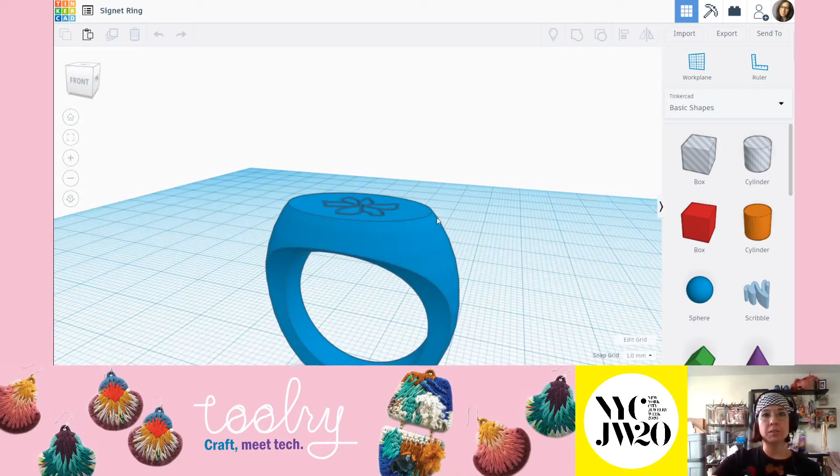So, the signet ring. I'm going to walk you through what we're modeling and the order we'll be modeling in, so you can know what to expect as we go along. This is an example of one I had done as just a little demo.

The way this is going to be modeled: we are going to start by defining this inner ring size, or the cutout of the shank, and again I will be using measurements of a size 6, so you could follow along if you'd like. Then we will move to starting to build this exterior shape, building out the actual volume of the ring itself.

We'll then position the cutout so that you start to get this flat surface up here. The last bit will be moving to the side and really carving down this profile. A signet ring is classically shaped with this flat, plateaued surface that has an engraving, an inscription. You could add raised details. I'm just going to show you how to do a simple engraving, but you can really have fun with this.

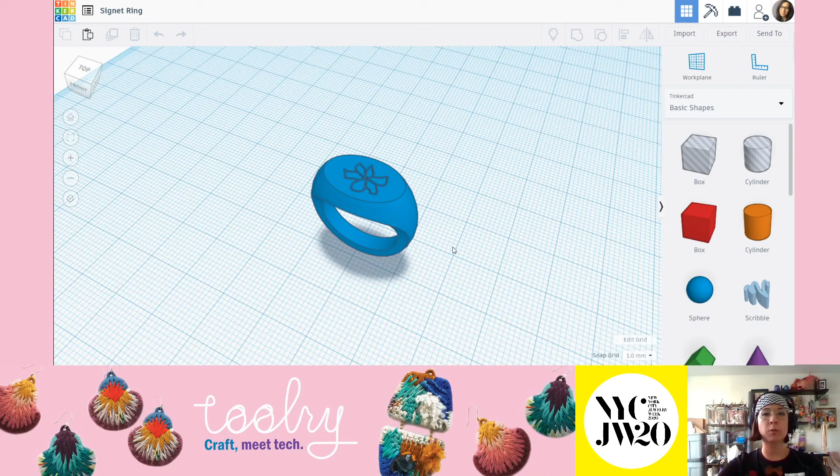This is a classic shape signifier of a signet ring, where you have this wider platform that then cuts down into a narrower side band.

One thing a bit different about this compared to other classes, if you've joined me for previous weeks, is that we will really be setting everything up. You'll have a lot of objects on the work plane before we trim everything down. It can get a little confusing because there's so many different pieces of geometry, but I'll walk you through each of those, and you'll see how it comes together very quickly at the end.

Some general guidance about this ring: if you do choose to fabricate it on Shapeways, where there was a coupon code up on the screen earlier, this ring as shown runs about $40 to $60 on Shapeways. However, it's not hollowed out, and I'll remind you at the end how you might want to hollow that ring out, which will cut away that price a lot, because the pricing is very dependent on the material used—how much brass, bronze, or silver you're using in that piece.

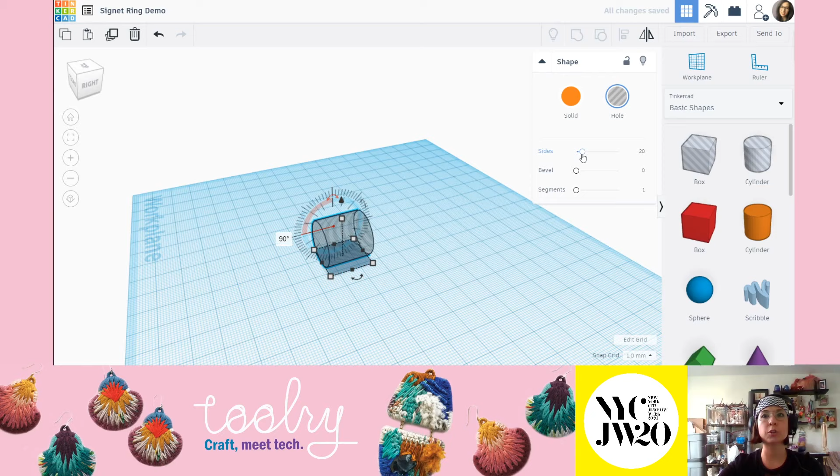Okay, so now it's your turn to go ahead and do that. I will do that again. We are going to grab a cylinder from the work plane, the cylinder hole, that one at the very top that's gray striped, single click to select it, and drop it onto the work plane. Then we are going to rotate it by 90 degrees, and increase the number of sides over here in the shape menu up to 64.

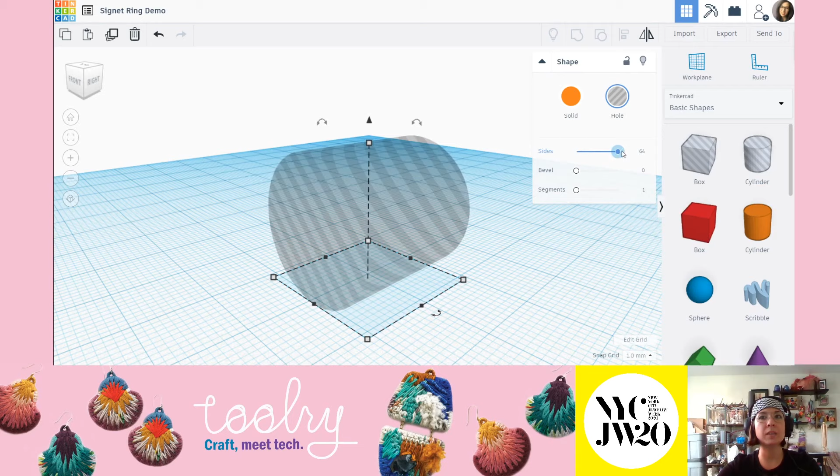Just to show you why we're doing that, if you're not familiar: I'm lowering it so you see when I've lowered the number of sides, this round shape is actually very flat and faceted. That's because this shape is a series of flat mesh faces, which is how it's represented in 3D software. What we want to do is increase the number of sides, or faces, to the maximum, meaning now it's a much smoother cylinder. You can still see these facets, but they're much smaller, and that gives you a much smoother finished product versus that more faceted shape.

So I'm just going to show that one more time to get you started: grab a cylinder, drop it to the work plane, rotate it by 90 degrees, and then increase the number of sides to 64. Okay, that's where we're at now. All right, so everyone should have exactly this on their work plane.

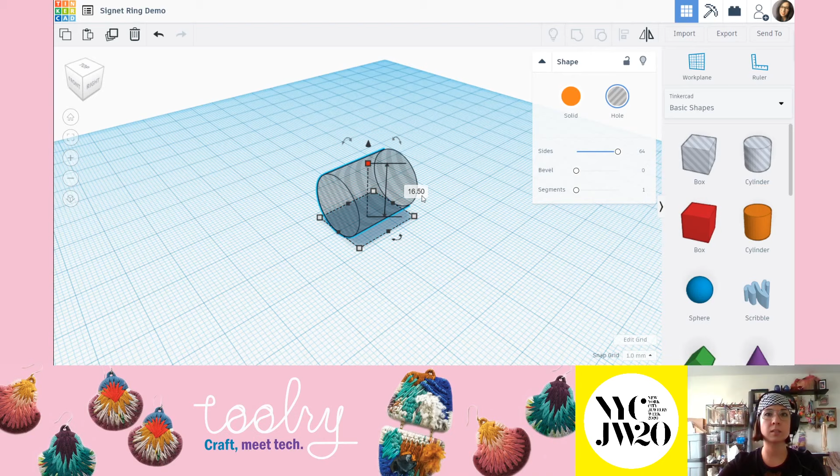So we are now going to resize this. All of these basic objects have a default size. The cylinders are 20 by 20 millimeters. We're going to change that now to be your ring size. As I mentioned, my ring size is a size 6, which equates to 16.5 millimeters. So I'm going to change my dimensions to 16.5 - oops, sorry, that was the wrong size - to 16.5. So I changed this front measurement to 16.5 and also the height to 16.5. I'm also going to be changing my thickness.

So at this point, you kind of have to decide what your ring shank thickness is at that thinner area, at that sort of side and bottom of the ring shank.

This is always up for changing, and the beauty of this design is that you can change it at any given time. We don't really set things in stone until the very end. So if you feel like it's too thin, too thick, you can always change that. Let me just do that again, and at this point you're welcome to follow along.

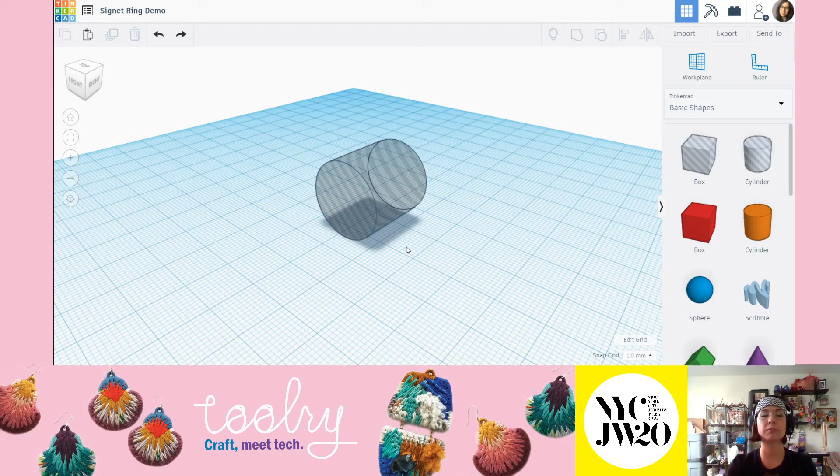I'm going to tell you what I'm going to do first. I'm going to change my ring size, change my cylinder size to match my ring size. And then I'm also going to thin it out to be the same thickness as the finished ring itself on that bottom and side walls. So doing that on screen, go ahead and follow along and do this as well.

Changing my measurement from 20 millimeters, which is the default, to 16.5, which is a size 6. You would key in your own ring size if you're doing a different one. And then also this height to be 16.5. And then the last thing is to narrow this cylinder out to be your desired thickness. I'm going with 3, that's what I had done on the model that I showed you.

I would say you could go down as skinny as about 2 millimeters, and as chunky as about 5 millimeters. If you go much chunkier than 5 millimeters, be aware that your ring size might have to get bigger. The wider the shank or ring band is, the more of your skin that gets in the way of it. So I'm a size 6 on my ring finger in a skinny band, but I'm like a 7.5 in a really chunky band. Just keep that in mind if you have a set ring size in mind.

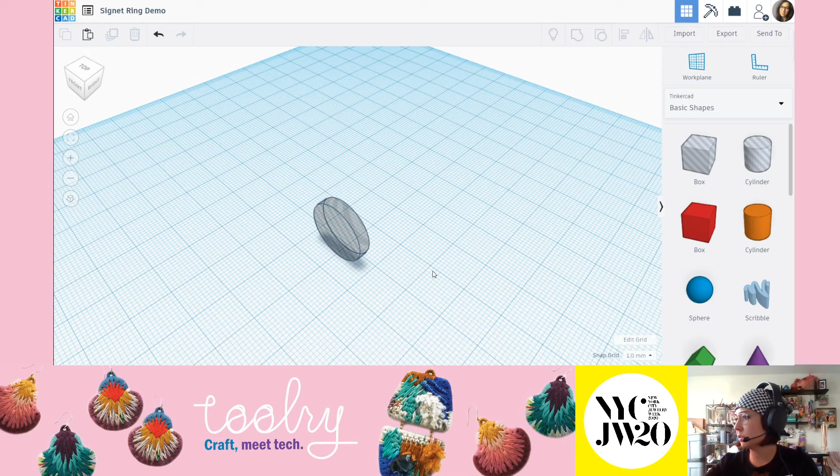Okay, looks like everyone is still caught up. You should now just verify on screen that your cylinder hole is your ring size, so 16.5 for me, and then I wanted to go with that 3 millimeter thickness. Yours can be wider or narrower if you'd like.

Okay, so the next step we're going to grab a sphere, and you can just watch this part. We're going to grab a sphere from the basic menu, and we're going to drop it right over top the cylinder, and it's going to cover it, but don't worry, we're going to change it to be a hole so that we can still see everything happening inside. Go ahead and do that with me. So again, that was grabbing a sphere from the basic shapes menu and dropping it just roughly on top of your cylinder hole. It starts out as a solid.

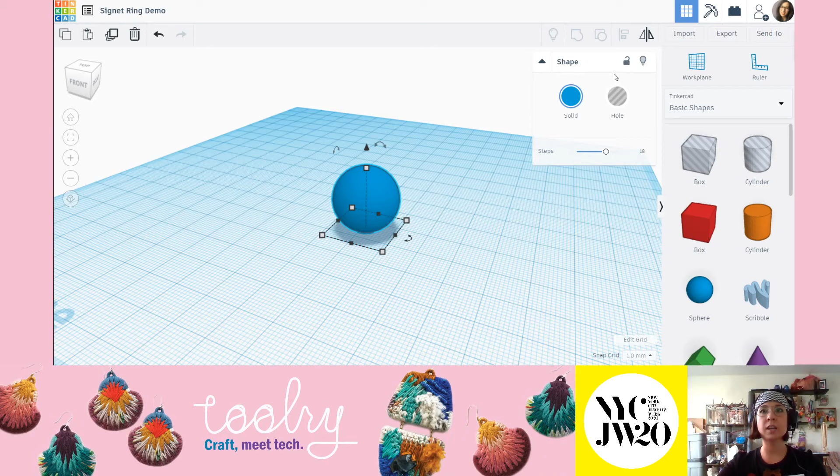We want a blue solid, it should look just like my screen. We want to just change that to be a hole as well, and it's going to be sitting pretty much right on top. Don't worry if it's not totally centered, we'll fix that. Okay, scrolling down, okay.

So this part, just bear with me for a second and kind of watch here. This is where it gets kind of tricky because we're not going to see things really coming together for the next few steps, so you'll just have to take my guidance and trust that it's going to turn out okay. So this sphere that we just put onto the work plane and turned into a hole, this is now going to be the outside.

This is really setting the wall thickness or the ring shank thickness. So this is really what's going to end up - it's going to be a solid, and this is going to be essentially the body of the ring. This sphere is going to be the whole body of the ring.

So you have to decide at this point, what do you want that ring band thickness to be? For me, I like to go anywhere from about 2 millimeters to like 3.5 millimeters, because think about, this is going to be what sits on your finger. And if you make it really, really chunky, it's going to feel like you're spacing out your fingers at the knuckles. So this is just like, what is the thickness of your ring?

At that point, you then have to decide what my new dimension is to account for that thickness. Let me give you an example. I want to have 2.5 millimeter band thickness, and that means that I have to add 2.5 millimeters on one side and 2.5 millimeters on the other side, totaling 5 millimeters. So my sphere is going to be 16.5 millimeters plus 5 millimeters.

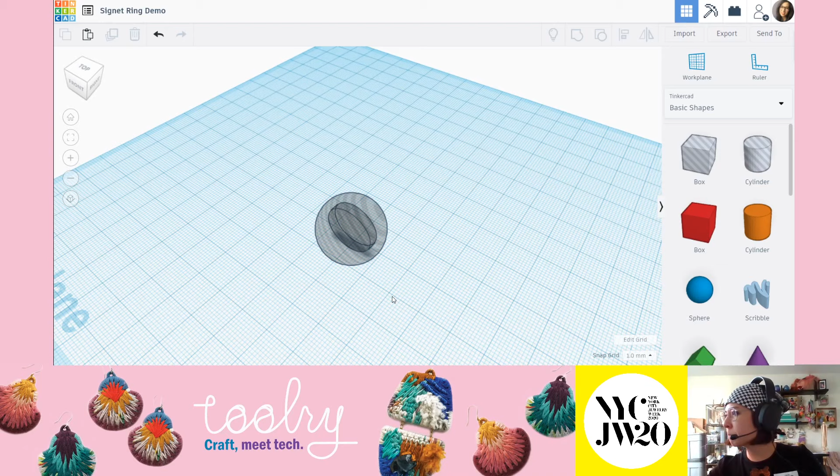Okay, keeping an eye on the comments, but looks like you guys may have figured it out. So moving on, we are just going to quickly center these two objects together.

A tool, if you're not familiar yet, I love this tool - this is the align tool. What align does is it lines up objects by common points, and in this case, the center point. Let me just show you on screen what that looks like.

I am going to use a bounding box, and to do that I'm single clicking and dragging my cursor, and everything that my cursor touches is now selected. I can verify that by looking at the shapes menu, which says 2 shapes are selected. What I want to do is select the Align tool, up in this corner above the Shapes menu. Now I get all of these nodes that pop up.

These nodes are various points of alignment that I can choose from. If I hover and don't click, you'll see different points of alignment preview itself in red, and the objects temporarily move to show me what those look like. That gives you some tips as to what you're aligning.

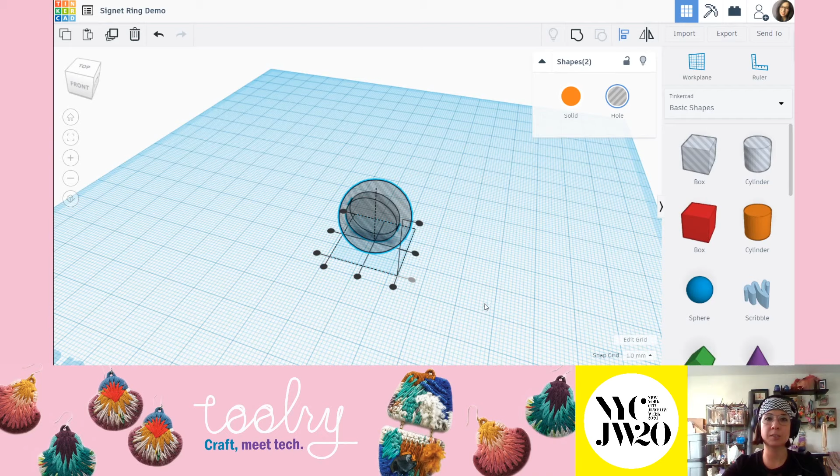What I want to be doing is aligning all 3 center points - there's a center point here, here, and here. That ensures that from every angle, those 2 objects are completely lined up in the center. You'll understand why we do this as we get a little further. So go ahead and do that.

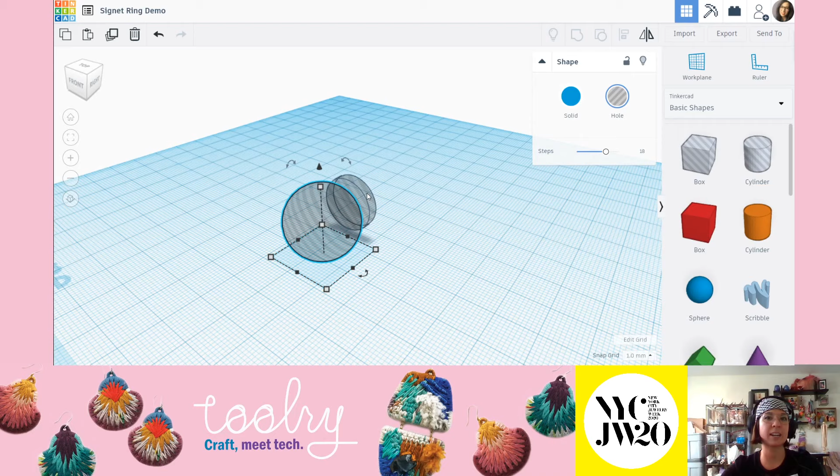I'm just going to make this more obvious so you can see what's happening. Go ahead and either bounding box select these 2, or you can select one, hold shift, and select the other object. That's a nice way to do that as well. It's a little harder when they're overlapping - you may not be able to grab one object. Oh, that worked, but it gets a little challenging as you've got multiple objects.

However you want to select both objects, do that now. Go up to the Align tool, and click all 3 center points of alignment so that they are grayed out - your alignment nodes should look just like mine. Your screen probably looks like mine, though your cylinder or sphere might be larger or smaller, but roughly this is what we're looking for.

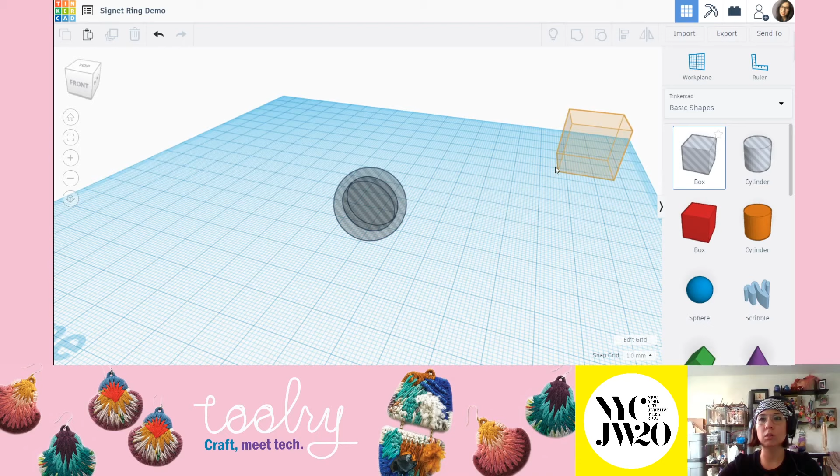Okay, to make it even more complex, we are now adding another object to the workplane. We are going to grab - you can just watch this, oh well this will be fast - you're going to grab a box hole, the hole box, which was next to the hole cylinder, and you're going to basically drop it in the same spot, overlapping with the 2 objects already on screen.

Once you've done that, go ahead and bounding box select those, then realign all those center points - you might have to rotate a little bit. So really all we did, and I'll do that again so you can follow along: you're going to grab a box hole, drop it roughly overlapping the 2 objects already on the workplane, bounding box select all 3 objects, and align like you just did, center points only.

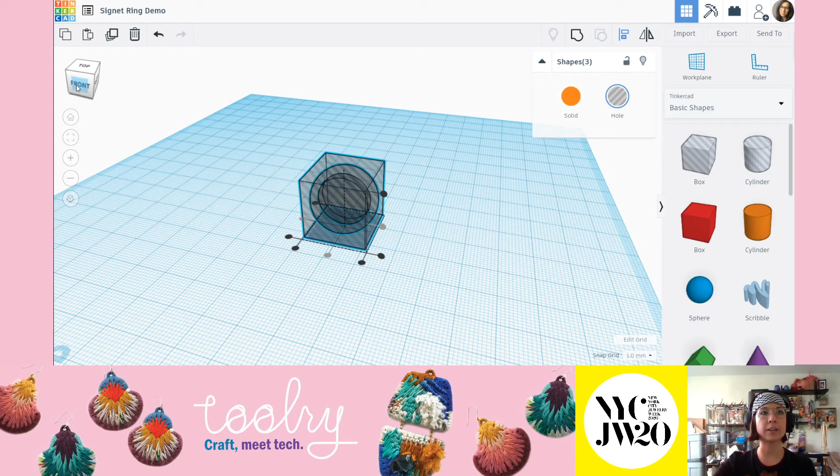I can also use that orientation cube to navigate to perfectly positioned views, and I want to do that now. I want to navigate to my front view, and you can just watch this part. So I'm going to click my front view on my navigation cube.

And I also want to flatten this. So now if you look at my screen, it looks a little odd, like there's still some perspective showing. I can see the back of the box. It's a little bit hard to sort of see these items as if they were a sketch.

So to fix that, I'm going to go down here and click on the flat view. And now this looks much more like a sketch and is much easier for me to view. Okay, so let me just show you that again and then go ahead and follow along.

So we've just aligned all of our three objects. We're now going to navigate on the navigational cube or the orientation cube, to the front view. And if yours looks like this, it means you need to click this bottom switch to flat view toggle. Your screen should now look like that.

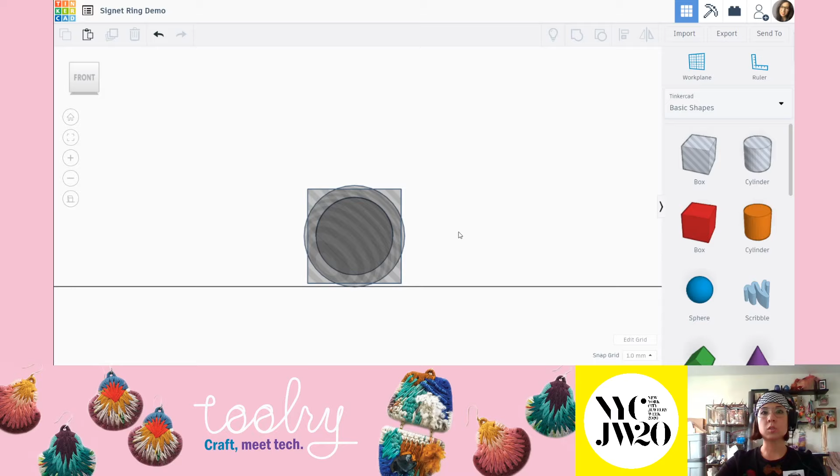Okay, so just watch. Sorry, let's grab a drink of water.

So just watch this step for a second, and I'm going to explain the next two steps that we're going to be doing, because this will really help you understand what you're trying to achieve. Right now I realize it just looks like a bunch of objects on top of each other, so just watch all of this.

We are going to be using this box hole to be the thing that slices the top surface of that signet ring. So the first thing we have to do is move it up here kind of out of the way and also widen it.

So I'm just essentially grabbing these nodes and then using my arrows to quickly center it. It doesn't have to be perfect because it's so much larger. I just want to show you, so I'm going to do all this again, just keep watching this.

So we're then going to lock this item, just because we don't really need to fuss with it for a second.

We are now going to, I had told you that this sphere hole, the second item that we added, was going to be the body of your ring. So what that means is I have to sort of deform this into that oval ellipse shape that you can then slice the top off to get that nice flat surface.

So to do that, I'm going to be grabbing this top white or hollow box, and I'm going to be stretching the proportions of this up, so it looks a little bit more like an egg right now.

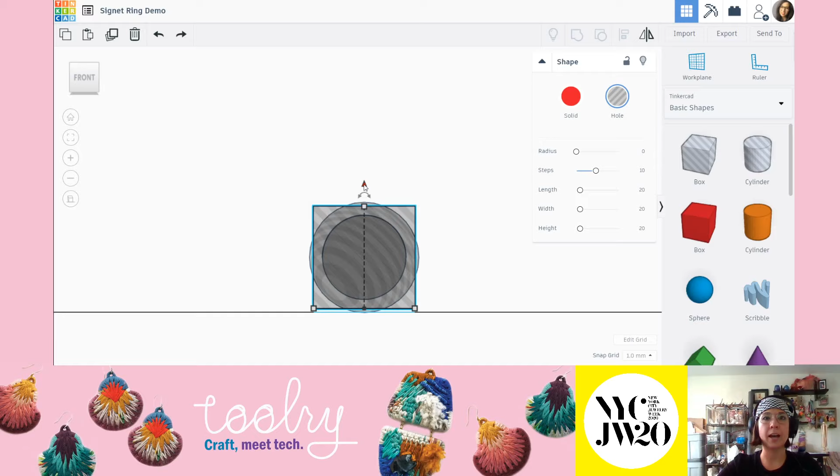Let me just do that again, and this time you can follow along if you have not. So we're going to select the box hole, use that black arrow above the box hole to raise it above your two circular objects. You're going to grab one of these bottom hollow or white boxes, stretch this box out to a rectangle, and then use the arrows to move it back roughly to the center point.

You can lock this, or you can keep it unlocked—it depends if you're going to have to move it again, you may just keep it unlocked. So the next step is going to be to grab this larger circle or sphere and reshape it to be more like an egg or an ellipse by selecting that top white box or hollow box and lifting that up. You don't want to grab the arrow, because that will lift the whole thing off the work plane. You just want to grab that top box and drag it so that you're reshaping it.

So at this point, this is sort of where you kind of play. I don't necessarily want to have a crazy high area here, so I actually might bring my box a little bit closer down. I think I like that a little bit better.

If at this point you feel like when you're moving the box, or resizing your sphere, it's moving in too big of a motion so it's sort of jittery, like clicking into place—that's because your snap grid down here is set to 1 millimeter, meaning every unit of motion is 1 millimeter. If you need more subtle movements, you can change this to be like 0.25, and now it's a much smoother dragging action. See how it's more smooth? I'm now moving in 0.25 millimeter increments.

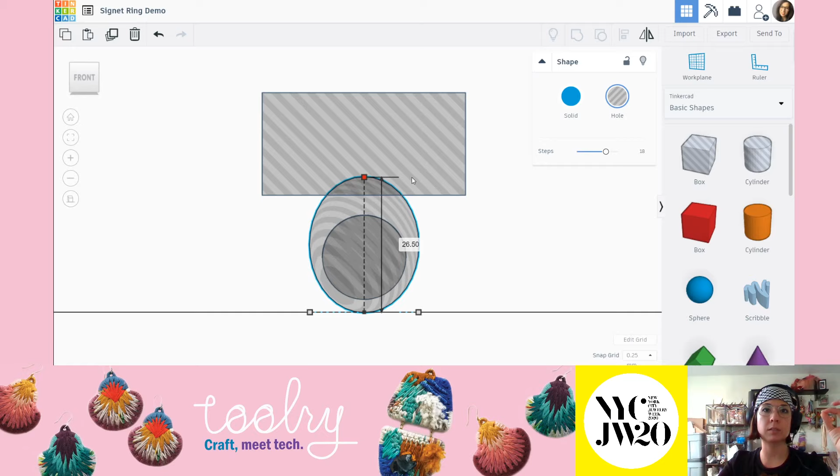So at this point, take your time to guesstimate what this is, proportionally, just looking at it. Again, we're not locking any of this at this point—we're saving that for the very end, so you'll have time once this really starts to fully come together to say, oh, you know what, I did want to make this a little bit thicker in this area, or a little skinnier in this area. You'll be able to move all that stuff along the way.

And this is an object that's very easy to ungroup and then unjoin these parts to edit as you go, if the very final ring isn't really to your liking. It's a really easy one to edit.

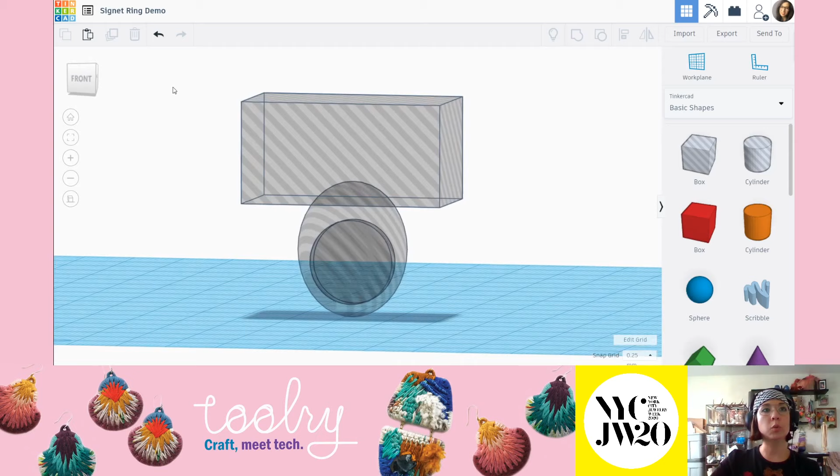Okay, so moving on, we are going to be going back to that orientation cube, and you can kind of just watch this at the moment, to now go to our side view. So our side view right now really doesn't look anything like a ring, so I just want to explain what we're going to be doing.

So what we're looking at right now, this inner floating cylinder in here—remember, that was the original ring size, the cutout of the ring itself. And this thickness right here was the thickness that you chose as your finished thickness; it was the very first step that we did. So this right now is really only serving one purpose: it's acting as a guide so that you can then build all these other objects around this and know what your original intention was.

This object, the sphere that's now more like an egg, this is going to be the actual body of our ring.

So we reshaped it from the front view. This is our surface cut. But now we need to reshape it from the side view, because this is a very wide ring at the moment. You might be feeling like, I don't know what we're looking at—this doesn't feel like a ring. It's really not going to feel like a ring until the last few steps, so don't worry if you're feeling a little confused at this point. It's going to make more sense pretty soon.

So let me have you go ahead and do that. We were in the front view, so use the orientation cube and click on that right flat view, so yours really should look very similar to mine. You should have the 3 objects showing, they're all holes, and you're seeing this flat view. Remember, if yours looks something like perspective, just toggle this flat view button down here on the left side.

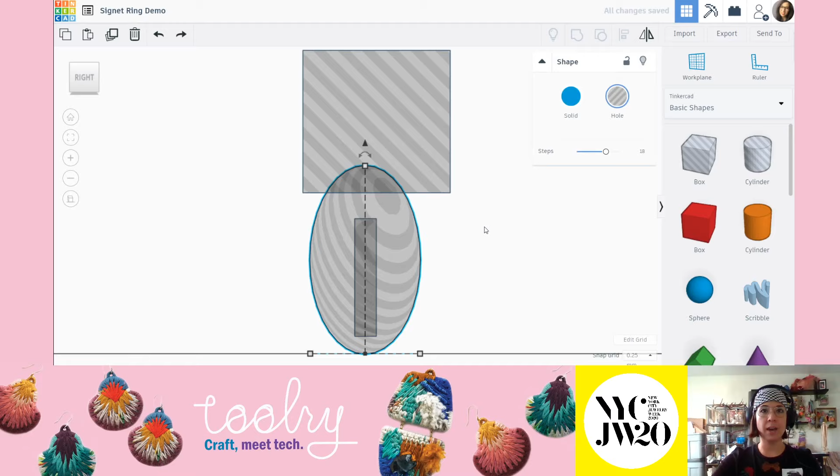So really, I'll just undo that. That was really just starting here, making sure your snap grid is at 0.25 millimeters, and then adjusting, narrowing out. You could also make this wider—if you want this to be a massive ring, knock yourself out. But I would recommend staying where you're at or going a little narrower, just to make sure the fit is still going to be okay for the size you're doing.

So you should have some kind of egg shape here. You could really make this skinnier, you could really go like this if you wanted, if you wanted a really little super delicate ring up there as well. So just work through that. Again, all of this is open for changes before we finalize everything. So if you're still kind of lost and like, how is this going to turn into a ring? We're getting close. Okay, so moving on.

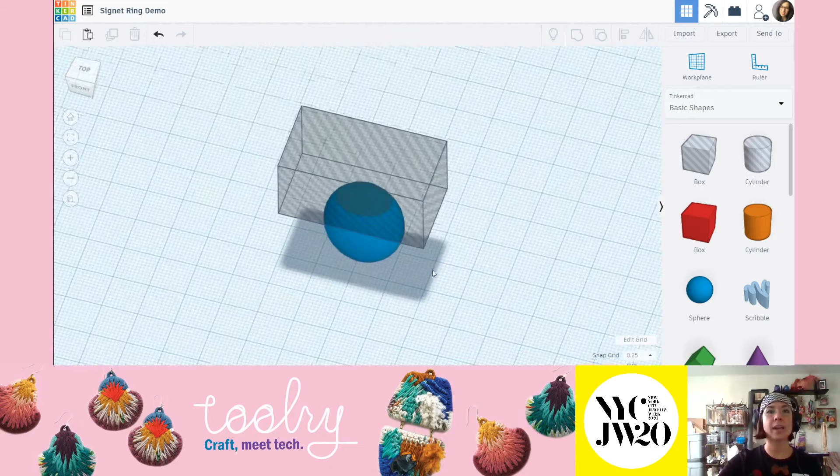So what I want you to do at the moment, this will really help lock this in. Let's quickly turn this sphere object back into a solid, and then pull out of that view a little bit so you can really see. All of that gray area on top where the box is overlapping is what's getting cut away. That's going to be the footprint of the top surface of your signet ring.

I hope that helps a little bit. If you need to make any adjustments and you're like, whoa, that's not what I expected, make those adjustments now. If not, go ahead and lock this box temporarily.

Let's see. Oh, actually, I'm sorry, that was unlock this box. I think I had meant to lock it earlier.

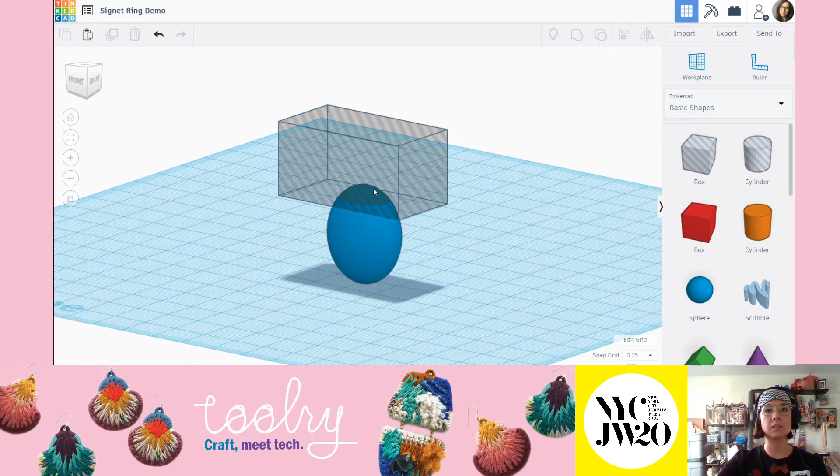At this point, this is the first bit of permanence that we're going to do. We are going to select the box hole and select this solid sphere, which should be blue unless you changed the color. We're going to group these items together. And mine doesn't seem to want to behave.

Okay, this is that thing I was telling you about. Let's just try that again. It's some sort of weird glitch. So I've got two objects, I group... oh, there we go.

So you saw before it didn't group, it just sort of stayed red. If that happens to you, this is where you could exit out of Tinkercad, go back to the main menu, go back in, and that should clear itself out. I've never had it not correct the glitch, so fortunately I didn't have to do that.

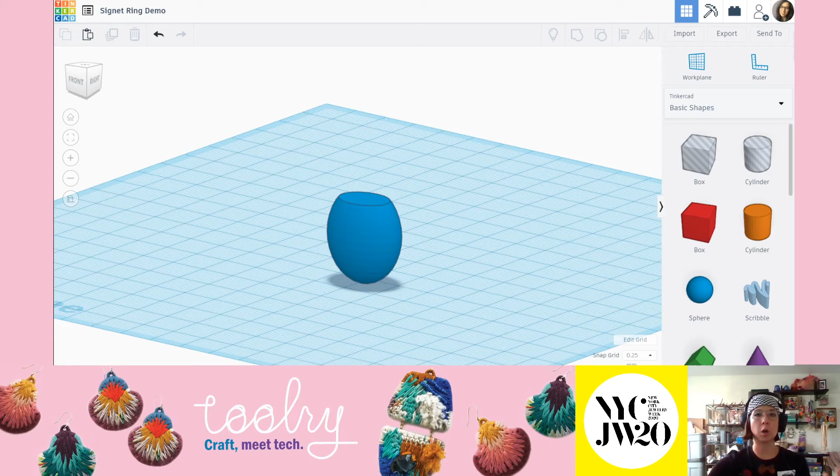So you should be here. At this point, the only thing we've really set is this top dimension. One thing you could do now is scale this in if you wanted to, but I would say wait and make those changes until you really see how all these pieces come together, because you can easily ungroup them, adjust one part, and then regroup. It's very fast to edit this.

Okay, so just when you thought this was staying solid, it's not. We're going to change this back to be a hole, just temporarily.

Let's grab a bounding box around those two objects and double check this alignment here. Okay, see how I don't have any points of alignment? I want to hit this side point of alignment — and it's not a big deal if you don't do that, we'll redo it. Actually, I want to hit both of these points of alignment, so let me do that again and show you.

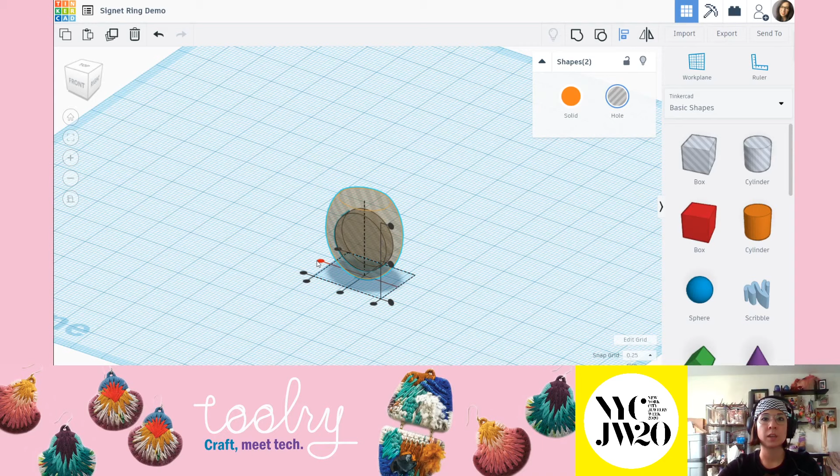So that was a solid — that's where you were just now. We're going to turn this ring body back into a hole so we can see things more clearly. We're going to bounding box select both of them and align them on the sides and in the center. I'm just going to leave that on screen.

Go ahead and do that so you can verify that our points of alignment are the same. You don't want any of these to be aligned — that's because these are two different volumes. You just want the center point here and the center point here to be aligned. Go ahead and double check that, and I'll leave this on screen for a second.

Okay, so I think you're all with me still. Let's go ahead and grab another box hole and add it to the work plane. This time I'm going to drop it roughly in front of my two objects. Go ahead and do this — just grab a box hole and drop it roughly in front, as I have mine shown.

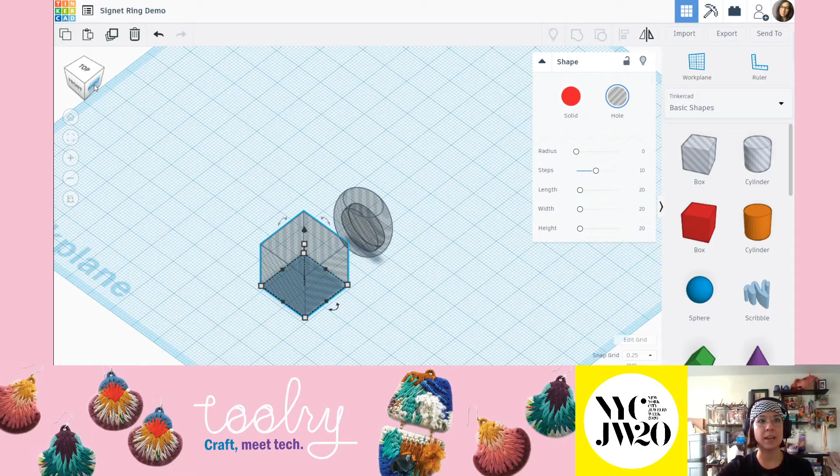We are then going to navigate back to that right side view on the orientation cube. These two items should look very centered — we just aligned them, and your box hole is sitting off to the side, waiting to be part of this design. I'm just going to get your attention on screen and show you what we're about to do, because this will look awkward until you understand the purpose this box hole serves.

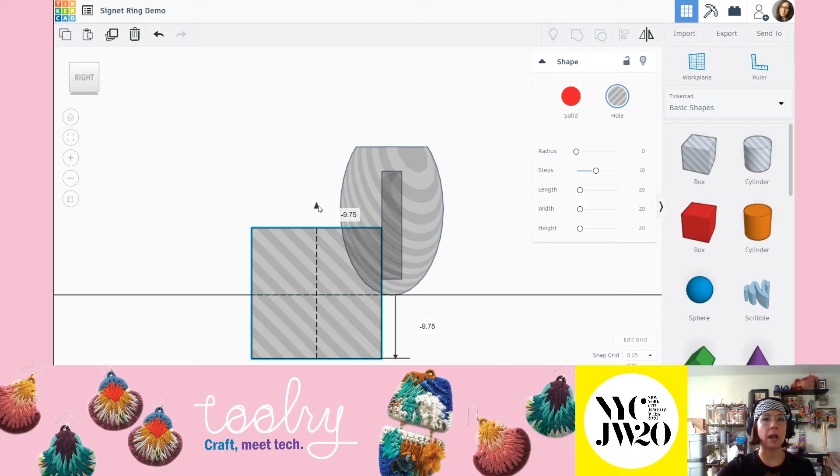So I am going to be moving with my arrows, moving my box hole right up against one side, the left side of my ring shank. I'm also going to use the arrow to move it down. Now, how far down? You won't really be able to decide that yet. I'd say a good starting point is about halfway down, but we might end up moving that. So this is where we're trying to end.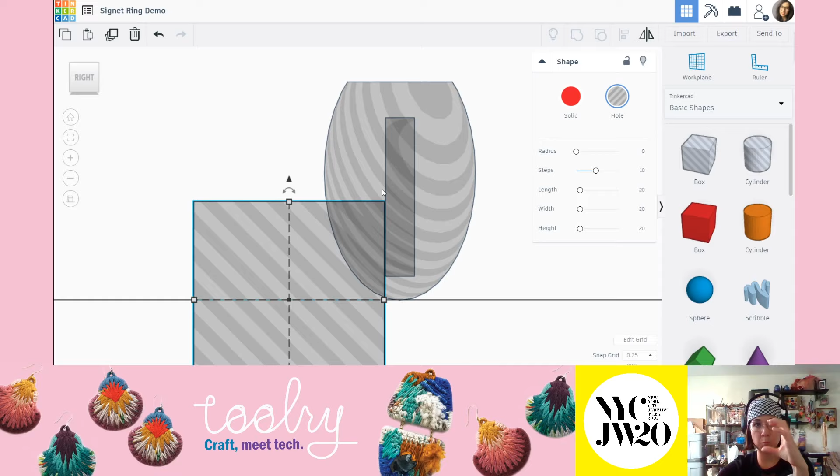The key thing here is that the right side edge of the box hole and the left side edge of the internal cylinder, that's my ring size, these should be pretty lined up. Doesn't have to be perfect. If I scroll way in, I have a little bit of a gap there, so it's a little bit too much. It's fine.

You want to be right here, and you want that box hole to be about halfway intersecting the sphere, or the ring body. So this is where we're landing.

Okay, so let me just undo that and walk you through that again. So you're here now, so you can go ahead and follow along with me. If you've got that box hole, and everything's a hole feature at this point, there's no solids on screen, we're going to click the right side view, make sure it's flat by hitting that toggle button to flatten it out.

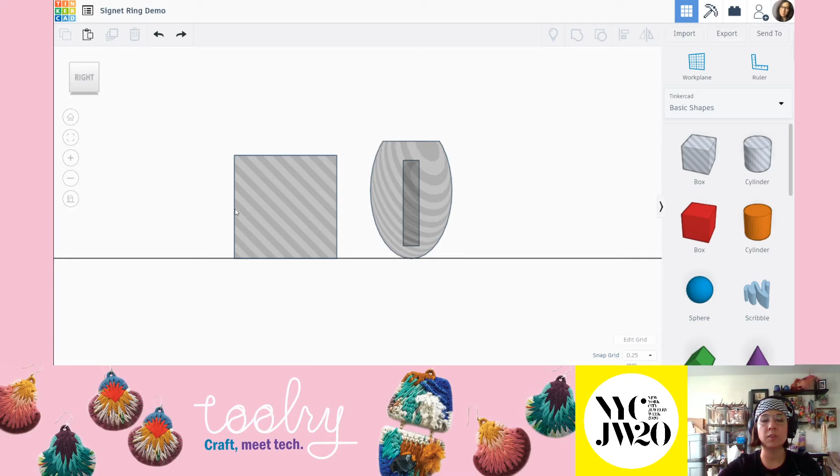Again, make sure your snap grid is on 0.25. Select your box hole, use the arrows to move it over so that it bumps up right against that little inner cylinder, and use that top black or solid arrow to move it down about halfway down the body of the ring. So everyone should be there now.

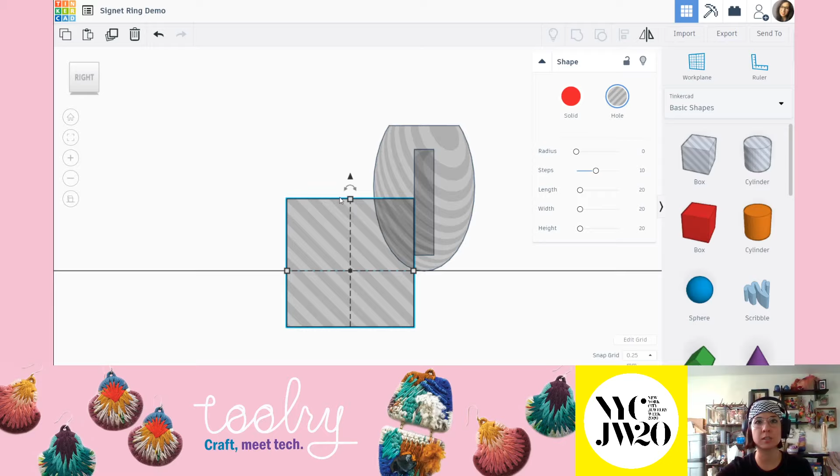Okay, so what this is going to be is this box hole is going to be something that cuts away and starts to give shape to our ring. Because if you remember back on the demo from when we first started the class, there was this wider area up at the top, but then it tapered out and became very narrow down on the sides and bottom of the ring shank. This box hole is going to cut away from our ring body eventually, but we've got to add some more material up here because right now it's just going to be this blunt 90-degree angle cut, which is just not cute.

So to do that, I want to introduce you to a new, really helpful tool. The work plane, and you can just watch at this point. The work plane is essentially the ground. It has gravity. When I drop objects on it, the objects fall and stick to it.

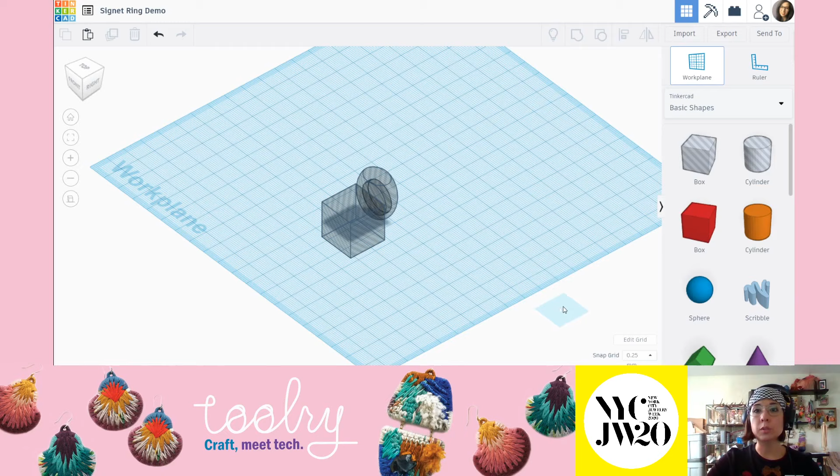The work plane can be temporarily relocated, and let me just show you what that looks like. So what I'm going to do is, up here, and we don't do this in most of these classes, but it comes in very handy when you need to stack something on something else. So this work plane tool up here, if I click this, and you can just watch along, I now have this little blue box that's glued itself to my cursor. As I hover my cursor, and I'm not clicking, it's just stuck to it. As I'm hovering my cursor on these objects, you can see that it's snapping to these different parts of my objects.

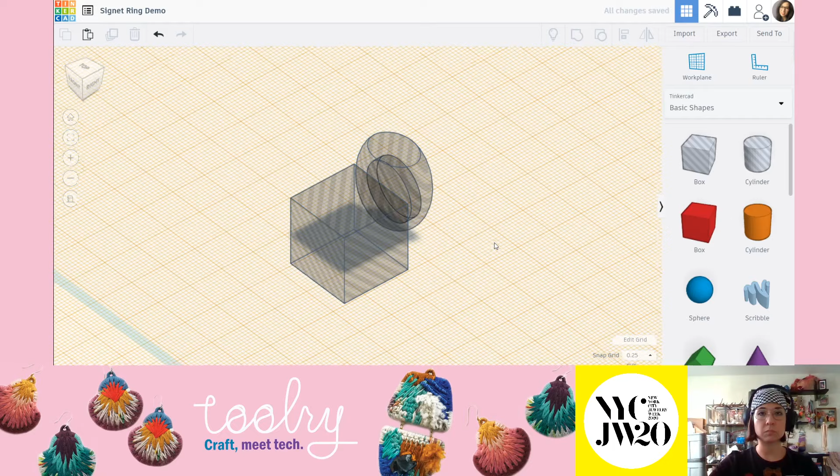Watch what happens when I drop it onto the top of this box hole. I now have a temporary orange work plane. And when I go and inspect where it is, it's sitting on top of the box hole. My objects have not moved. My work plane has repositioned itself to be the top of this box hole.

So the reason we're going to do that is we're now going to drop an object right on top of that box hole. So let me just show you that again, and you can follow along now. You're going to go up to the work plane tool, single click to select it, it will stick to your cursor, you don't have to keep clicking.

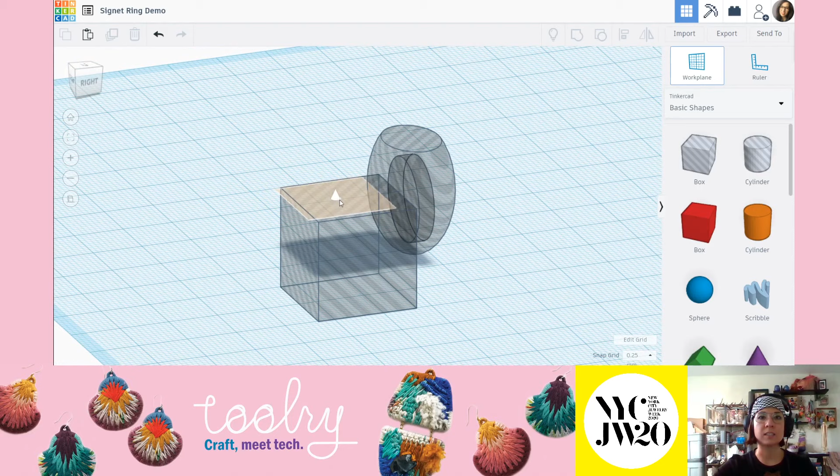You're then going to scroll in, and you're going to hover until it's gluing itself to the top of the box hole. Single click once to set it, and it turns orange. And just do me a favor, just to verify that it's in the right spot, kind of rotate and look underneath the work plane to make sure that it's sitting right on top of the box. Okay.

So the reason why we did this is we want to add an object that will shape the cutting object that we're creating. The shape that I want to ask you to use is this round roof.

Just watch for a second here. Here are the steps you'll be doing. You're going to grab a round roof and drop it roughly on top of that box. See how it's now sitting on the box? You're going to rotate it by 90 degrees so that the curved face, the half sphere face, is now facing the right side.

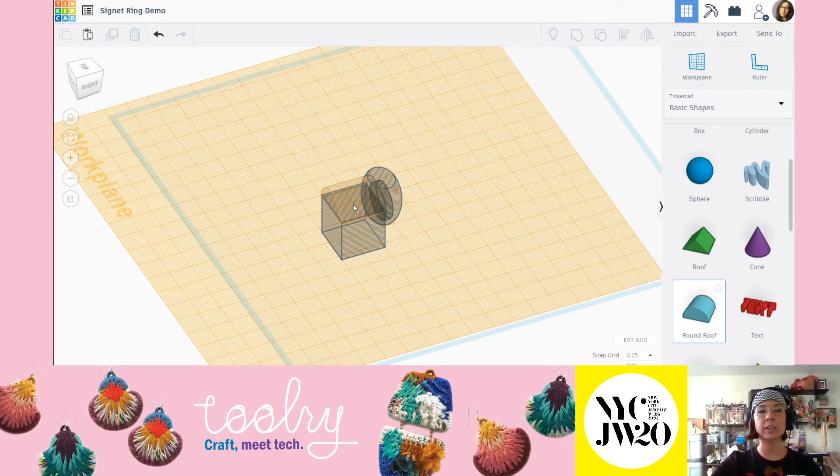Okay, let's do that together now. So you've repositioned your work plane to be on top of the box hole. You're going to select the round roof shape and drop it roughly centered with that box hole. Rotate it 90 degrees so the actual arc, the half circle, is facing the right side and now facing us. You should all be here.

So the next step that we're going to do is align just the round roof that we dropped and the box hole that we had on the work plane.

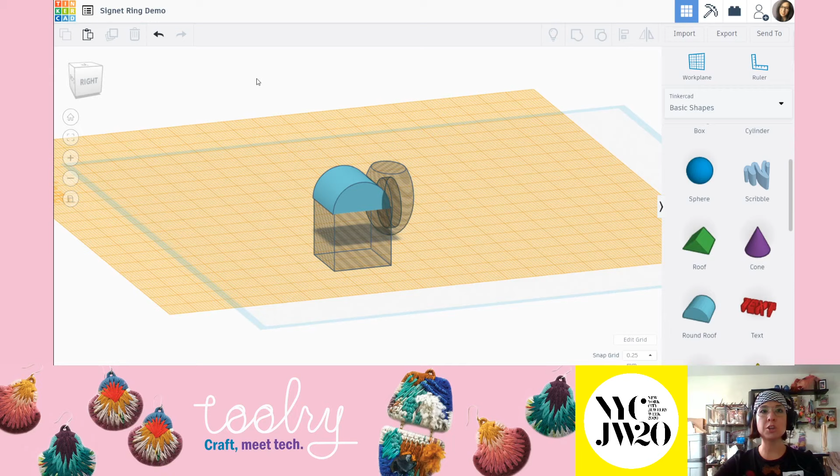So you're going to either bounding box select - now if you do a bounding box here, make sure you don't accidentally grab all of these items. You don't want 4 items selected, you just want these 2 items. You can also click one, click the other. Just verify that you only have the 2 items before you align them.

Now you're going to align these top points. When you click the top points, because these objects are the same size by default, 6 of the 9 black nodes are going to turn gray. I'll leave that on screen so you can verify yours looks the same. So you just want to click one of the top points alignment, another top point of alignment, so that you've got 6 top gray nodes showing alignment.

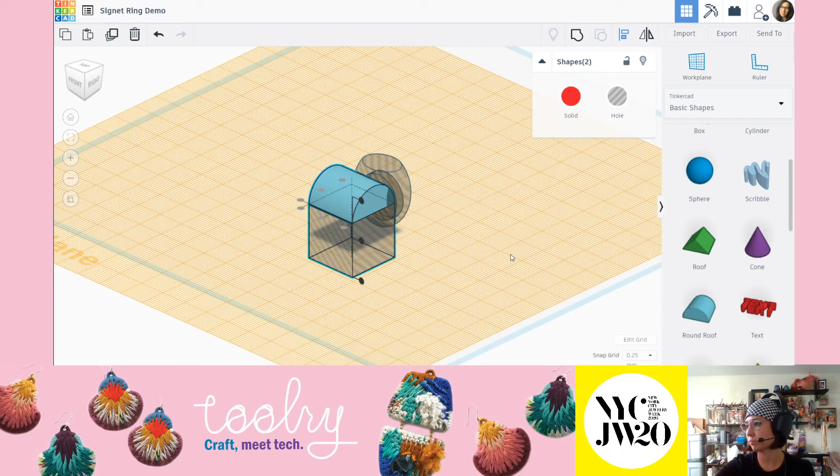Okay, so if everyone is there, at this point you can grab your work plane, and just to reset things so it looks a bit normal again, grab that work plane tool and drop it somewhere on this white area around the border, and that will just reset the work plane. Then we're done with the work plane for the moment.

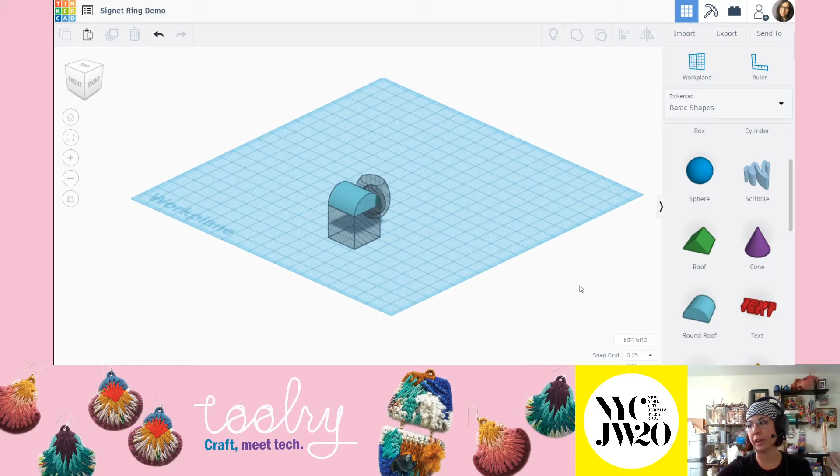So we now want to navigate to the right view.

Okay, let's just talk about this for a second. I'm just going to quickly do something - just don't mind me for a minute, just to make this a little more visible for you.

So let's talk about this for a moment. What I want to show you here is, and you can follow along, I'm going to change this round roof to be a hole. So what are we looking at? These objects, the round roof and the box hole, these are going to be cutters that cut away into our main ring body that has the flat surface. So you can start to see what's taking shape here.

I realize that everything has shifted a little farther away, so I'm just going to grab it and use an arrow to move it closer. What I'm looking at right now is all of this area up here - this is going to be my side profile.

Actually, just for clarity, let me do this. You see this dark blue area right here? This is what's going to get cut away. So this is how we're creating that nice curve that transitions that wider, bulkier top to be the narrow part of the ring band.

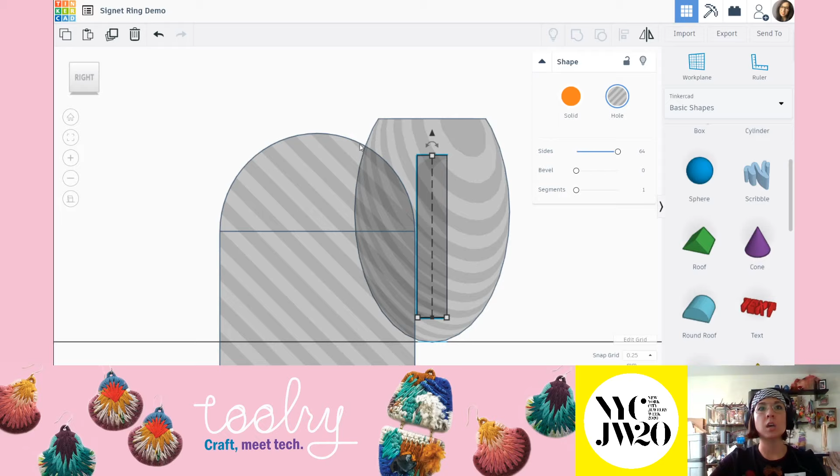So to make that a little clearer, this intersection point right here, where this object intersects with this object - and I'm going to scroll in so it's very obvious - this intersection point needs to be sitting at the same level or above your inner ring size cylinder. So right now, just imagine if you extended this line all the way out.

See how that intersection point is above my cursor? That's what we're looking for. What we don't want is to have this way down here, because you're going to end up cutting all the way out and have this weird little section right here. If that doesn't make sense, put your cursor on this intersection point, where this line curves with this line, and ask yourself, is this a higher point than this down here? The answer should be yes.

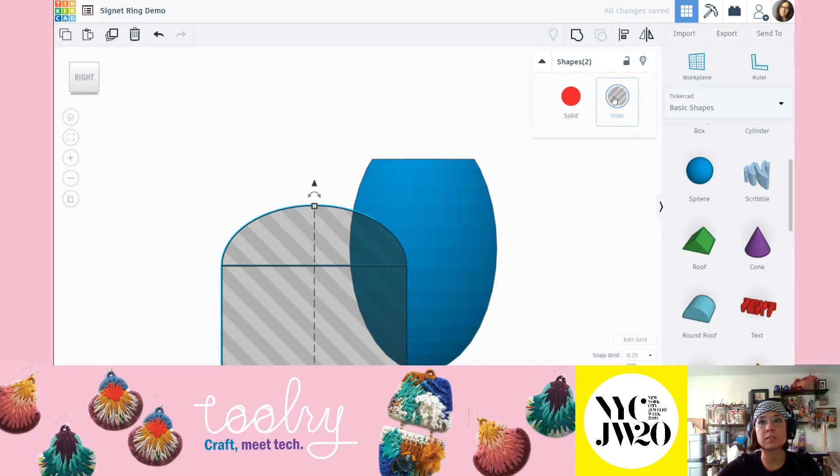This is your opportunity to reshape this curvature right here. I'm going to go back and show you what I mean. So this is a certain kind of curve. If I want this to be a much shallower transition, that's fine. That just means I have to grab both of these objects. Let me turn this back to a hole. So see, when I did that, if I like this curve, you can still have that curve. You just have to move these two objects up together to ensure that transition point or intersection point right here is not sitting below this line.

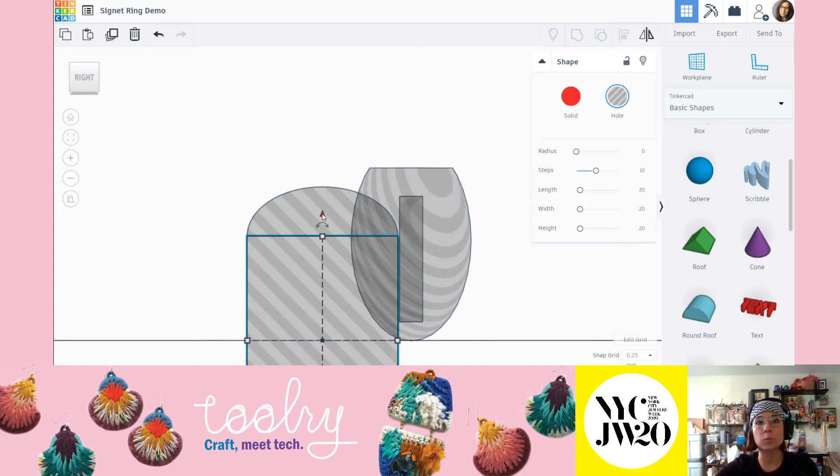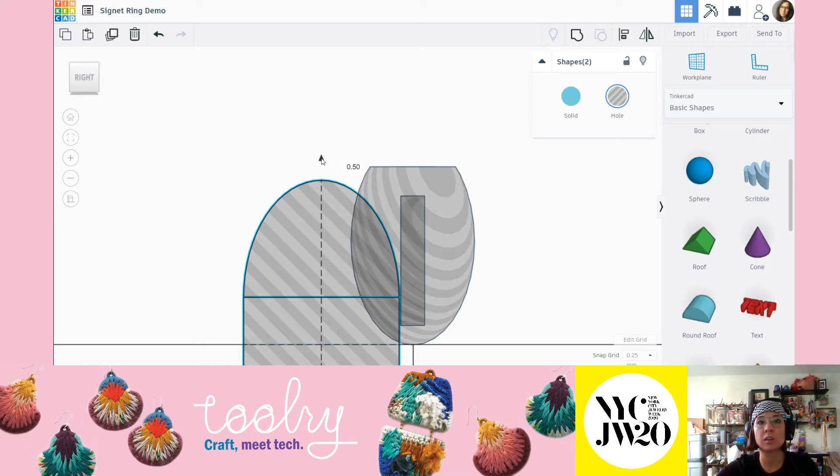So that's what we're going for right now. These objects are going to be grouped together, but first you have to decide what kind of shape you want this to be right here. Do you want this to be a really gentle slope? If that's the case, that's fine too. Again, you just have to make sure that intersection point right there is not below. See, right now it's below. I have to move these two objects up together to ensure that intersection point is at the same level or above this top line right here.

So I'm just going to undo and walk through that slowly. I'm not going to talk too much, but if you need to watch along, you can. So this is a hole. I'm going to go with a shallower curve. So I have to raise all this.

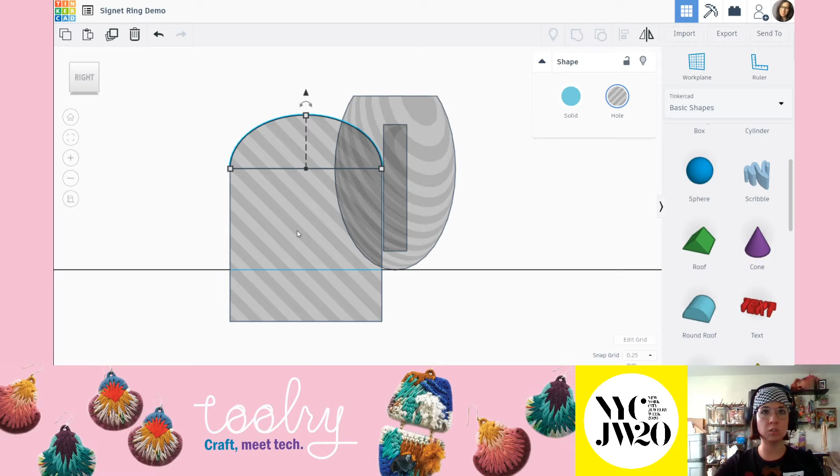Once you're happy with this, really, this is the shape we're looking for, you're following this line. Once you're happy with that, you can then select these two objects, the round roof hole and the box hole, and group them together to make them one cutter. You should basically lose that little line. This should now look like one shape, like a little piece of toast, a little piece of bread. Again, before we move on, just make sure that intersection point right here is at the same level or above this line. Otherwise, you're going to understand why that's a problem later.

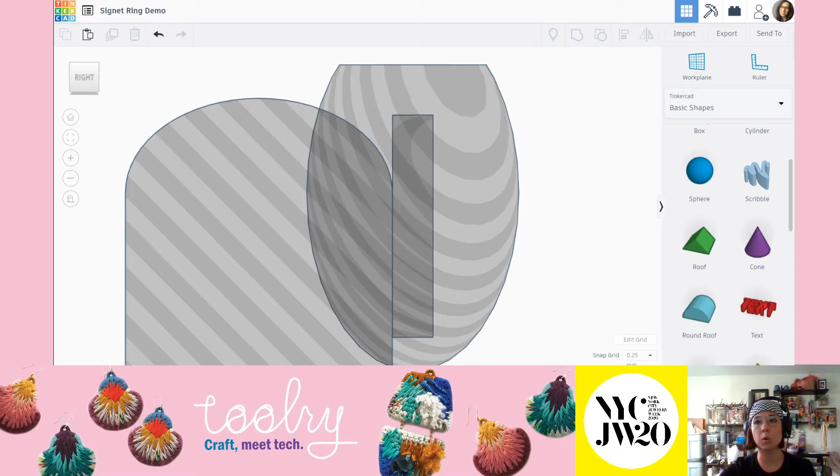The very last thing we'll do with this one object: if you feel like this gap is too big, ideally these two lines are perfectly touching, there's no gap. If I try moving that over, I actually get really nice and close there. That's perfect for me. If you feel like you're overshooting or always have a gap or overlap, you can also change your snap grid down to 0.1, the smallest amount of incremental movement you can make. I wouldn't turn it off because your arrows don't work anymore. You have to keep it at one of these intervals, so 0.1 or 0.25, just to close that gap as much as you can.

Once you've done that, the last object we're going to do is to move this over to the other side, or duplicate it. So we're just going to select this cutter, which was the round roof and box hole grouped to combine them. We're going to duplicate it, which is this little layer button up here. Click it, it will blink once, then use the arrows to start moving it over to the other side. You can probably guess where this is going: it's going to now sandwich the other side of that inner sphere or cylinder in there.

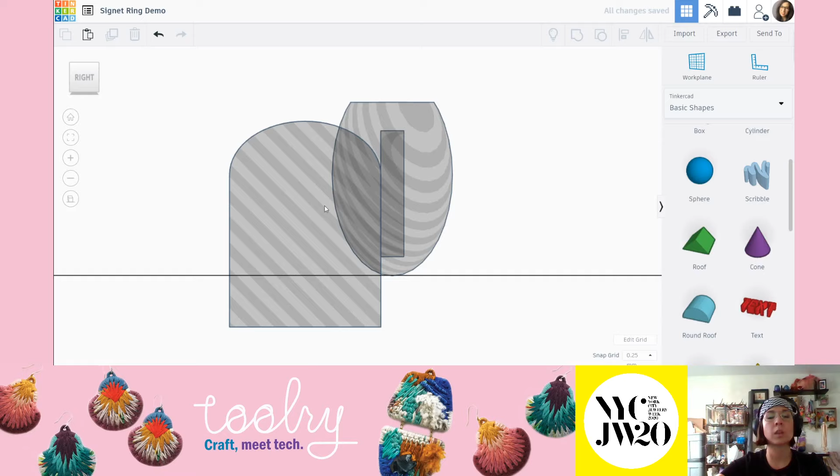Once you do that, you're going to group these two objects together. Let me show you that again, so you can follow along if you haven't done it yet. Select that cutter object. It should be one object now.

Duplicate it, using the layers/copies icon up in the corner, then use your arrows to move it over so it's now hugging the other side of your inner ring size. Grab those two objects, select them together with a bounding box, just the two cutters, and group those together. We're grouping objects that are not intersecting or overlapping with each other.

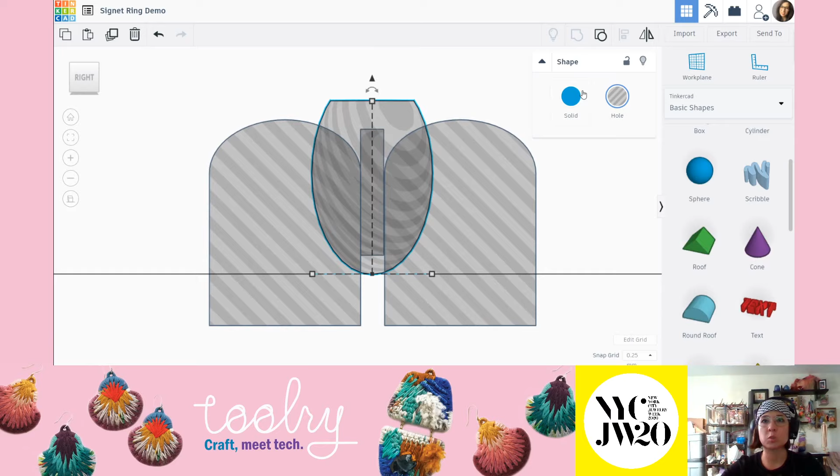That's a nice way to lock them together, to make them act as one object instead of two, and I'll show you why that's helpful in this case. At this point, you should be able to visualize what your ring looks like. Your ring is all of this area that doesn't have any overlap. So if it helps, turn that object from a hole into a solid to visualize it - this is now all of this blue. That is my final side view.

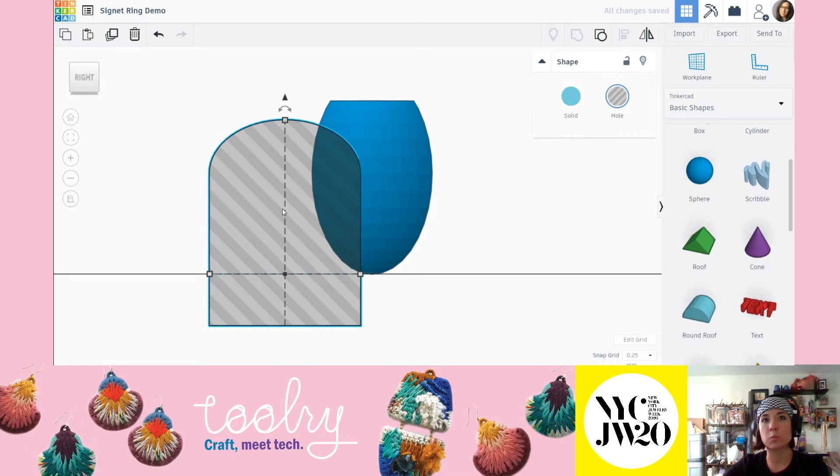All of this area that's grayed out is going to get cut away. So now is the time to ask, am I happy with this shape? Do I like this curve? Do I want it shallower and tighter, or longer and softer? I'm going to move on, but if you'd like to change this, you'll need to go back and revise it. It's easy to ungroup all this stuff to revise - just ungroup, delete one, reshape it, regroup it, and duplicate it over again.

Let me just see if I can undo that. Okay, so we're all right here.

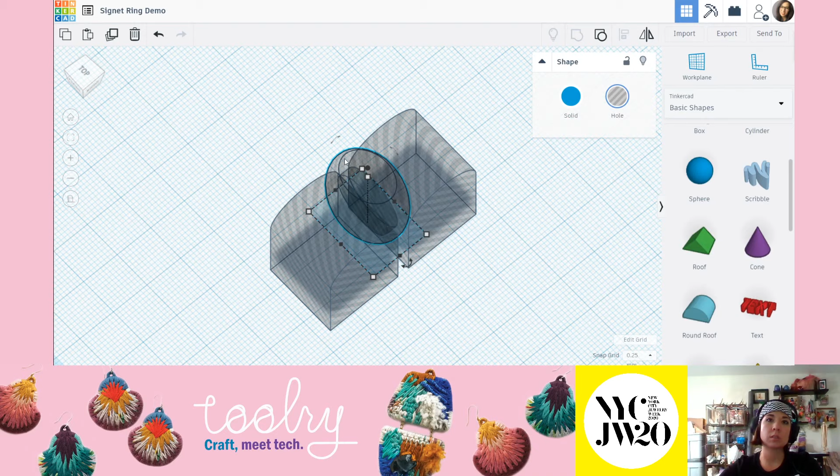So to finalize this and see what our ring actually looks like - because at this point you're just seeing all these objects, and there might be moments where you don't like something, and that's totally fine, that's part of this process - we're now orienting to the top view. The last two things I need you to do, and you can watch along: select that sphere, which is the body of the ring, and turn it into a solid.

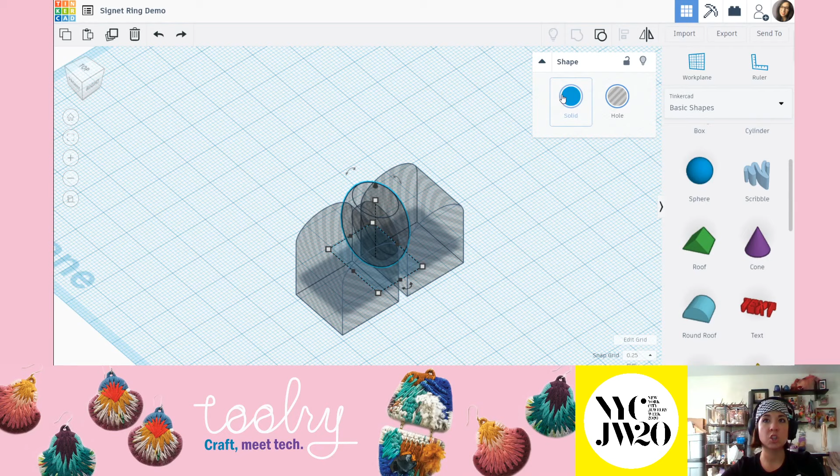Make sure these cutters are wide enough to cleanly cut through the entire ring - you don't want it hanging off on one side because you won't be able to cut that away. Extend this box out so it's the right size. Go ahead and do that, and I'll do it again with you: scrolling out a bit, looking from the perspective view, selecting the ring body, changing it to a solid, selecting the cutters (which should be grouped as one object), and widening them so they clearly cut away that object.

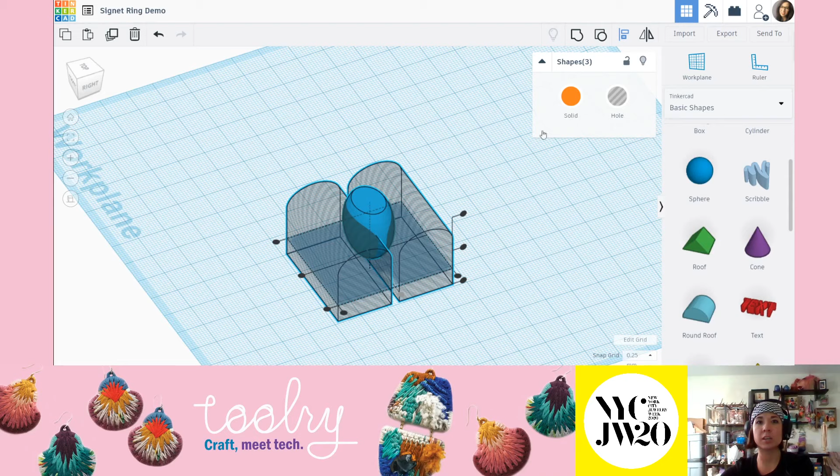Before we group this, the very last thing we want to do is align everything. Drag a big bounding box around everything, hit the align tool, and you're only looking for one point of alignment right here - the center point on the right side. That is the only point of alignment you want to click right now; otherwise you can throw things off. If you accidentally clicked a different one, please undo that. I'll leave this on screen so you can verify your alignment matches mine - only that side center point of alignment.

Now to set all of this and cut everything away, single click to select your solid sphere, then hold shift and select your cutters, and then group those objects.

This is essentially what your ring is mostly going to look like at this point. If you're thinking this looks terrible, remember we built all those objects without trimming too many things as we went, so you could really evaluate this and decide: do I like this? Do my proportions make sense? Do I want to change anything? If you do, that's totally fine - just ungroup all of this and change the proportions that you need.

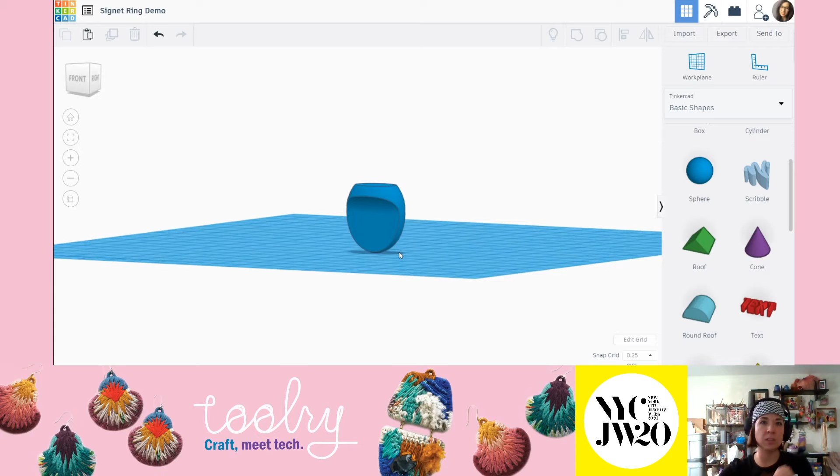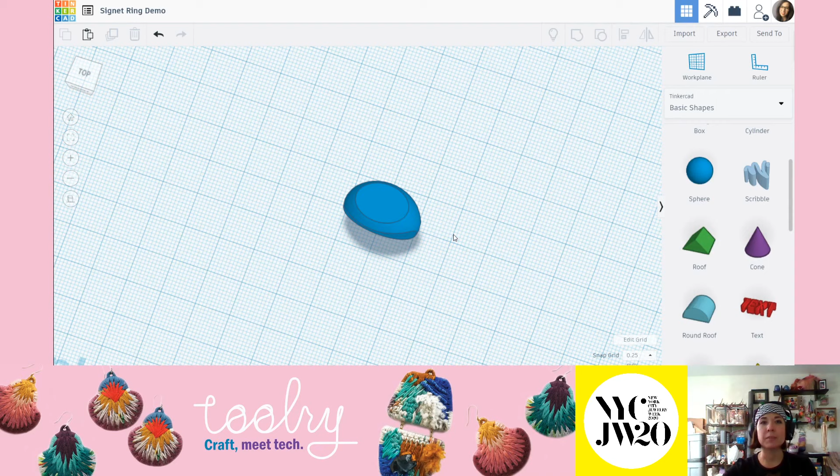For me, if I want this to be curving up faster, that means I would need to lower that front view sphere shape so there's not so much being cut off. If I feel like there's not enough of this plateau or platform, that means I might need to resize the sphere or reposition that box hole that cuts away.

There aren't that many objects that make up this shape, so you can easily ungroup these without having to undo all that. Just ungroup all of it and then change the object that needs to be changed, now that you know how this piece was put together.

So we are going to move on. The very last thing I want to say is we obviously need to cut our ring band, our ring shape, out of here. To do that, you need to find that guy again.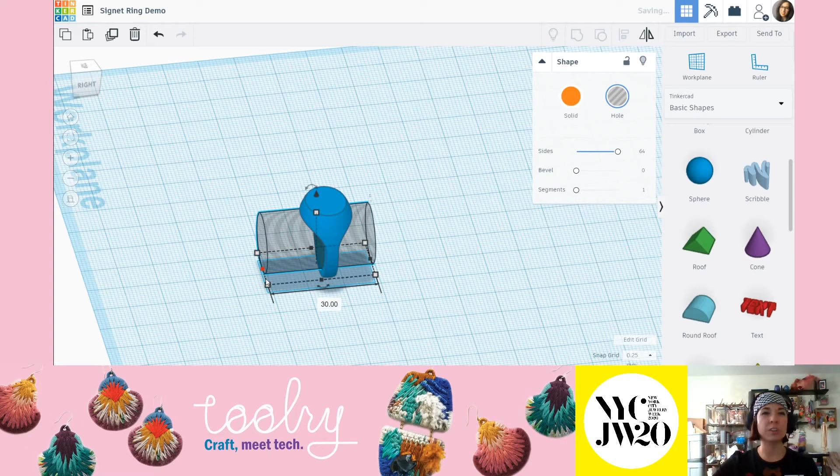If you can't click it, like see, I can't find it - that's all right, I'm just going to move this out of the way. There it is. You can now resize this because you used it as a guide, but now all you're doing is cutting the hole. So just resize it so it's plenty big, and then make sure you recenter it.

The center point you're looking for is only right there, just that one center point. So resize that and then group all of that. Let me undo that, show you again, and go ahead and follow along.

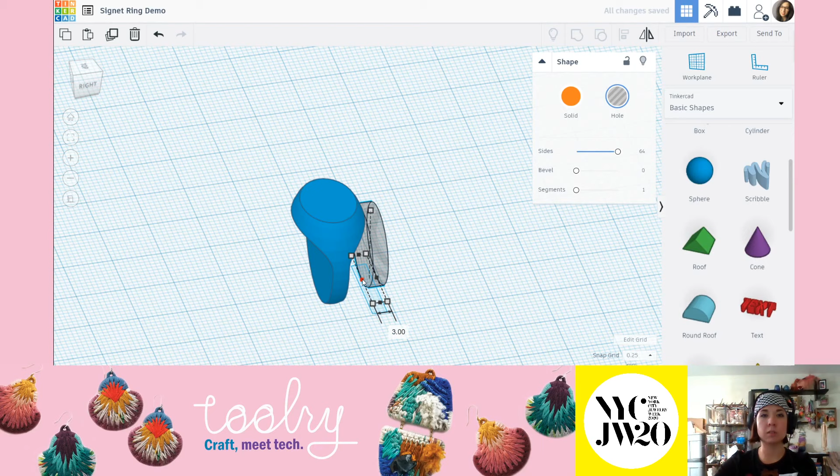If for some reason you can't seem to select that hole, it's sort of sunken inside the ring - just click on the ring, use the arrows to move it out of the way. Find your hole cylinder, make it plenty large, and then double check that alignment so that only this point of alignment is grayed out. I'll leave that on screen so you can verify and get there.

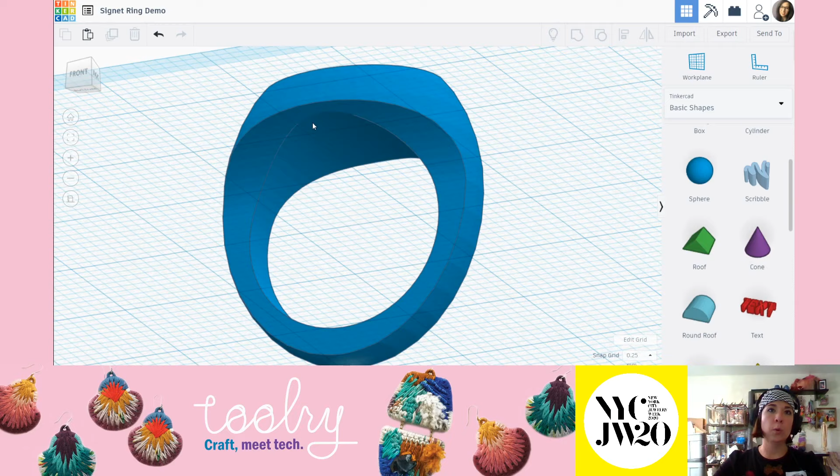The last step is to grab both of those objects and group them together to cut away your ring band. This is why I was saying you want that intersection point from the side view to make sure it's above, because see this cutout right there? If my intersection point was lower, I would have taken this chunk right out of that, and that's not a cute look. So yours should look roughly like that.

If you ended up having that intersection point sitting much higher, you probably have a little wall right here. That's totally fine too - if you fabricate this and order it in a polished finish, the polishing is going to soften these edges. Not a crazy amount, but it is going to take the edge off, so you won't have these really crisp corners. You'll have this sort of little polished down section.

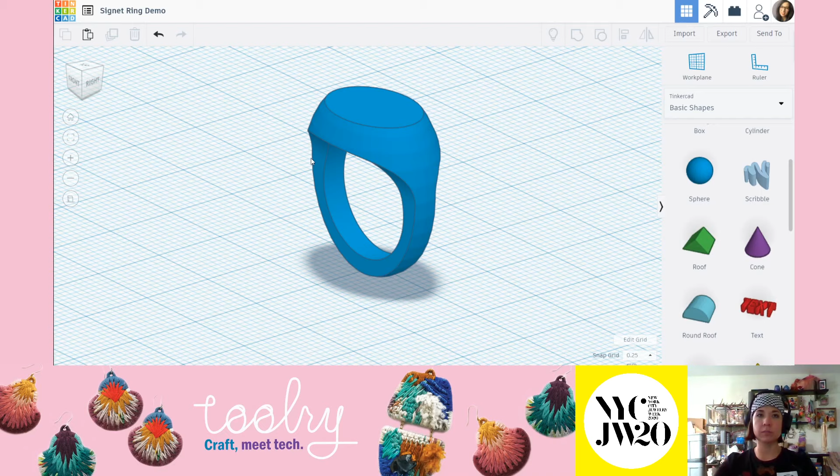At this point, the last thing we have to do is really work with this blank slate up here. Again, if you don't love some proportion of this signet ring, or now that you know what you know you'd like to go back and play with it, that's fine. Maybe what you could do, if you plan to edit your ring, is duplicate it so you've got two, and just hide one of them. That way you've got a blank slate to play with, and you can verify up there that it's hidden.

But moving on, the last thing we're doing is really decorating or adding our design to this top surface. There are two ways I want to show you how to do that. The first, and most contained way, is using the scribble - you can also use text, but I'm just going to show you with the scribble. Going over to the basic menu shape, you can follow along and select the scribble, and this takes you into this new interface.

I can see a preview of my ring up here, but really I'm very curious what this tool does. You'll notice I have this little circle attached to my cursor - think of this as your pen or your brush. And now we're going to be drawing some kind of design.

I'm doing my own initials in cursive, in sort of the true style of the original signet ring. And then when you hit done, you now have an object.

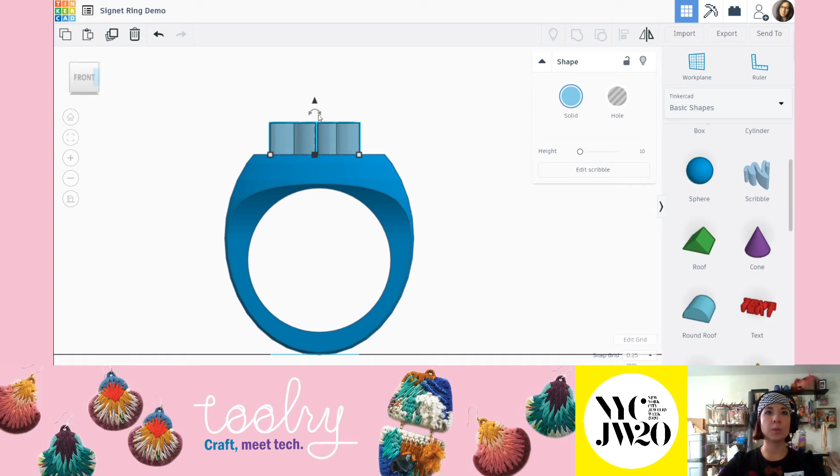A typical engraving is 0.5 to 1 millimeter deep. I wouldn't go too much deeper than 1 millimeter. If you want to raise this off the surface instead of having it be an engraving, you can do that as well, and I wouldn't go much taller than about 1 millimeter. Let me actually do the raised version, since I haven't done that yet.

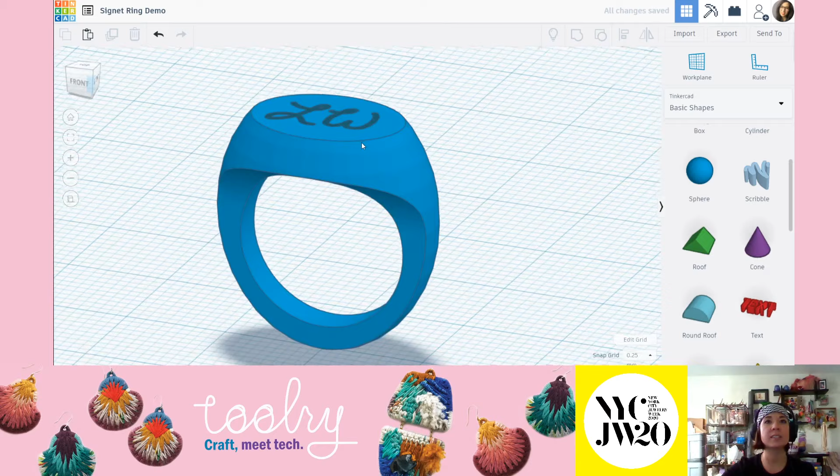At this point, I could group these objects together and now I have a ring. If I wanted to make this a cutout, I could turn that into a hole or an engraving. I could select these objects and use the align tool again to align the tops, and now I can see that I'm right on that surface. Group all of it, and now it's a cutout. So you've got both options - that's the one way with the scribble.

I'm just going to delete the scribble. The other way that I want to show you is with an SVG file.

You may or may not have pulled an SVG file. If you want to follow along, you can, and if not, you can just watch and decide if you want to try it out later. In the comments I have a link that you can use to convert clip art to an SVG file. Let me show you what that looks like.

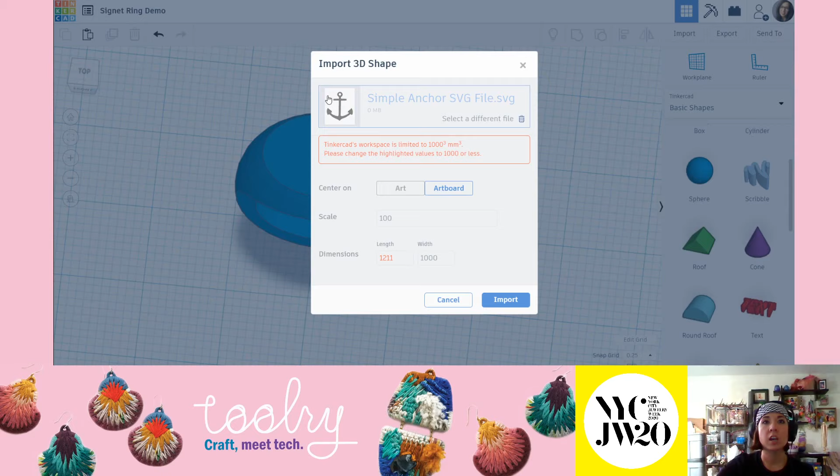If you do have an SVG file, you're going to go to import, navigate to wherever you saved it, and select your SVG file. You will have a preview of what that file looks like, and you will also have to decide what size it imports as.

These units are in millimeters, so for me I'm going to say this is probably 10, maybe 15 millimeters tall. It will readjust to verify what the measurements are based on the proportion of your artwork, and then it's going to import it.

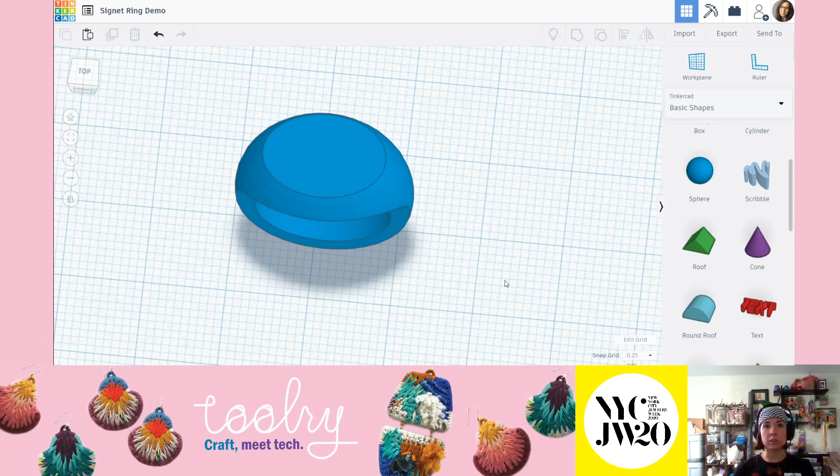You'll quickly understand what the SVG file does. All of the white area in that simple sketch is going to be nothing, and all of the black area is going to be geometry. So when you're looking for an SVG file or clip art to convert, make sure that you have something that has black values and white values. You don't really want gray because it's going to muddy the water, and you don't want a lot of texture. You want a pretty solid, very simple sketch, like this anchor - this is a great example.

You can also create your own SVG file simply. Let me show you one that I did - I did my own handwriting using a Sharpie and a white piece of paper, and then I took a photo with my phone.

Weird, why is it not doing it? This is odd, I actually wonder if maybe I can only have one SVG file. Let me just answer that for myself really fast. That's weird - you may only be able to have one SVG file at a time. I've never tried this, so I actually don't know.

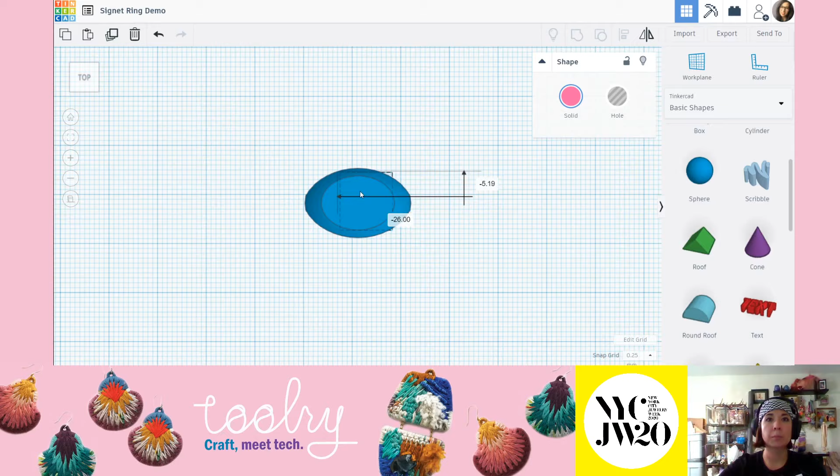So the same process holds - you would select that item, move it in place, raise it up, resize it, center it however you'd like. And then decide: is this going to be a cutout, or is this going to be a raised object?

And then you group things together. Okay, so that really concludes the class tonight.

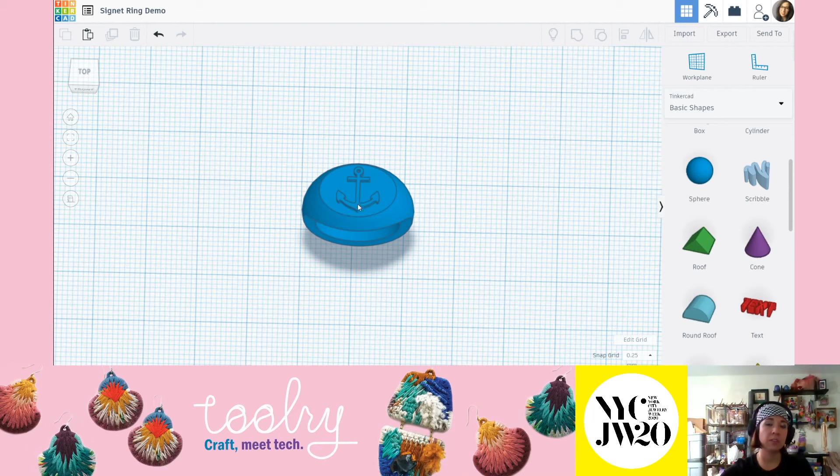One other thing I'll mention is you don't have to do a very simple shape. This is really just a blank slate. If you wanted to build some three-dimensional flowers, put studs, little cone studs on there, go crazy. A signet ring can really be whatever design you want. Classically it's initials or some sort of engraving, but this is your design, so you can do whatever you would like.

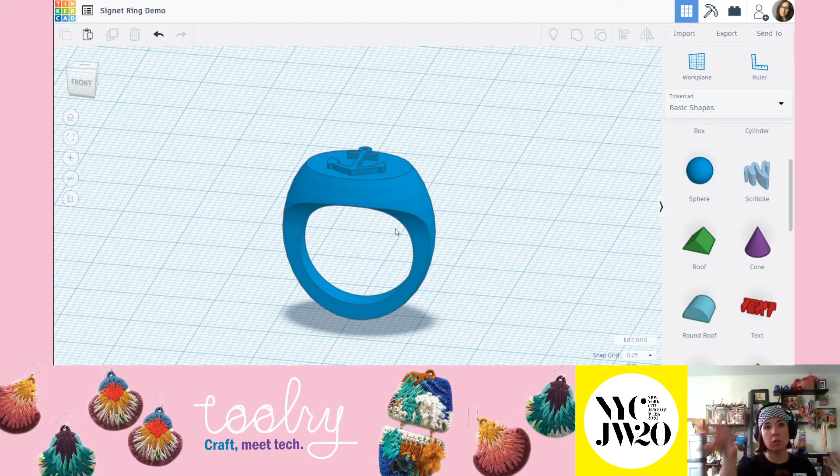The price point of this item is like $40 to $60. However, you can really bring that down if you hollow this area out. Right now all of this is solid mass. You can hollow all of that out, or a bit of it, if you want to, and really save yourself a lot of money. It's kind of shocking actually when you start to hollow things out. That's a pretty typical jewelry workflow.

So that's just some things to keep in mind. Hollowing out is also a way to cut into some of this material here. If you want guidance on how to do that, I'm not going to show it in this class, but feel free to reach out to me. I'm always happy to jump on a Zoom conference and give you a little tutorial of how to do that, or give you some guidance if you're really serious about fabricating this. So that's it.